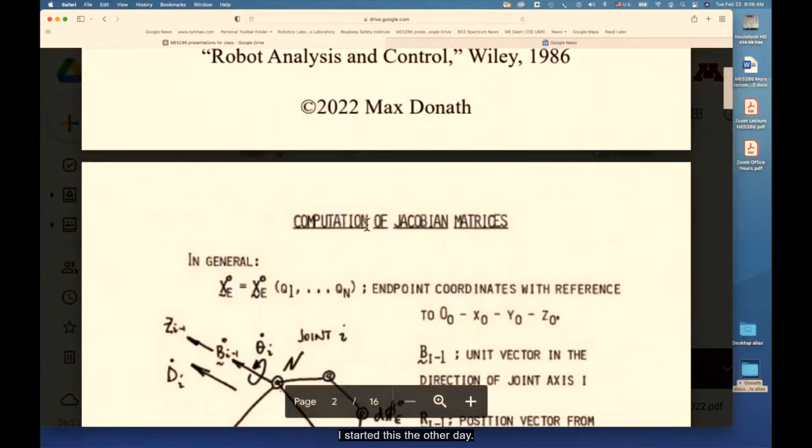All right, so let's begin. I started this the other day, and we're going to be looking at the Jacobian elements. Essentially, we have a robot, multiple degrees of freedom, multiple joints, starting with the base O sub 0, and there's x, y, z. We're going to have a revolute joint. And again, the base joint could be prismatic, and this is just arbitrary. We have a revolute joint in this particular case, in this direction, and there are arbitrary joints all over this robot going in every which way direction.

And if I pick a particular joint, joint I, I think the important thing is to recognize no matter what kind of joint it is, whether it's a revolute joint or a prismatic joint, there's several identifying characteristics of that joint, which is basically related to how we do the DH, the Denavit-Hartenberg convention. But at every joint, there's either going to be a revolute joint, in which case there's an angular velocity, theta sub I dot. Or if it's a prismatic joint, there's a d sub I dot.

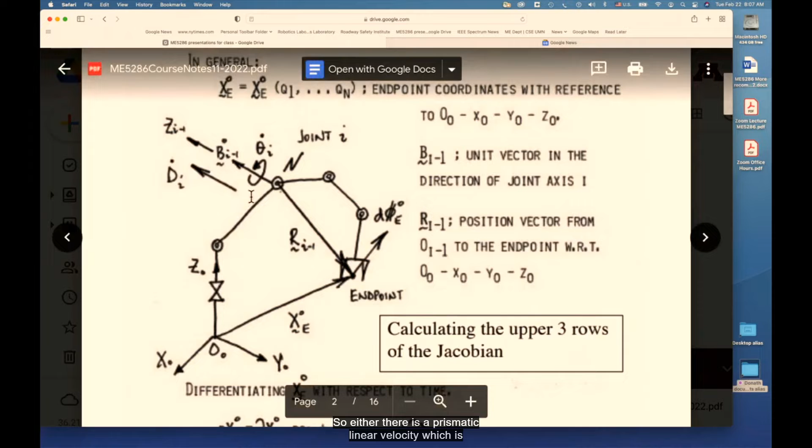So either there's a prismatic linear velocity, which is directed along the z sub I minus 1 axis. Remember, z always, whether it's a revolute joint, it's about z sub I minus 1 for joint I. If it's a prismatic joint, it's essentially an extension along z sub I minus 1. So again, joint 1, joint 2, joint 3. So if I take joint 43, it is with respect to z sub 42. And so there's the normal z-axis.

And associated with each joint, there's a unit vector. The unit vector is always going to be pointing along the z-axis for that, the z sub I minus 1 for that joint. That's this unit vector B. So there are several characteristics at an arbitrary joint. A revolute joint has a joint velocity, a rotational velocity. A prismatic joint has a linear velocity, and they're acting along the normal for that particular joint. And then if we keep going all the way to the end point, this is basically where we're at.

The whole point of the Jacobian is to determine what is the velocity, the derivative of the endpoint with respect to time. And the Jacobian is our way of figuring out in world coordinates and base coordinates, not the joint velocity, the endpoint velocity, how is it related to the individual joint velocities? So that's the whole point behind what we're doing here.

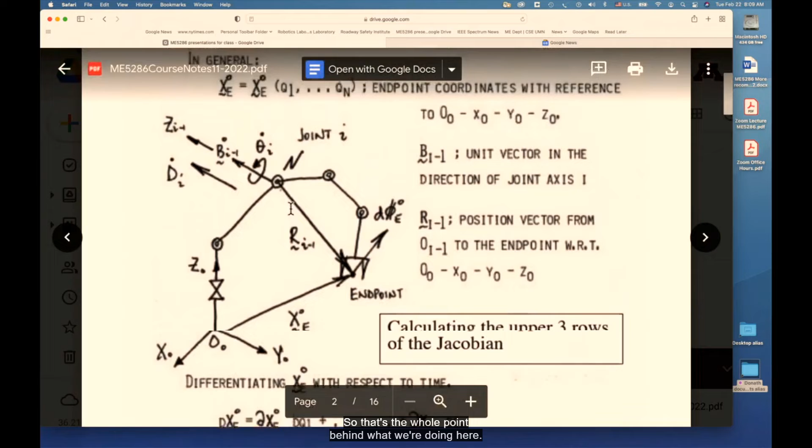B sub I minus 1, the unit vector, and again I basically described this, but a very important vector which I want to point out to you is this vector r, and there is an r sub I minus 1, which is a vector pointing to the endpoint. Now, why is that vector important? Because if it is a revolute joint, there's going to be a cross product involved in order to help us calculate the effect of the rotational velocity of that joint on the translational motion of the endpoint. Okay? There is going to be an effect, and that effect is going to be a function of how far away the endpoint is from that joint. All right, and we're going to just break that down into elements as we move forward.

The other day I laid out this result, and I've put this on the board a few different times, and today I'm going to do it again, but not on the board. Putting it on the board takes a lot of time, and I basically pre-wrote it out, and we'll take a look at it shortly. But before I do that, I just want to remind you that the velocity of that endpoint, again, notice these little zeros up on top, because we are calculating the velocity in the base coordinate frame. And so the velocity, that means the derivative of a vector. Remember, x is a vector. It's going to have three translational aspects to it. There's going to be an x component, a y component, and a z component. So this is the derivative with respect to time.

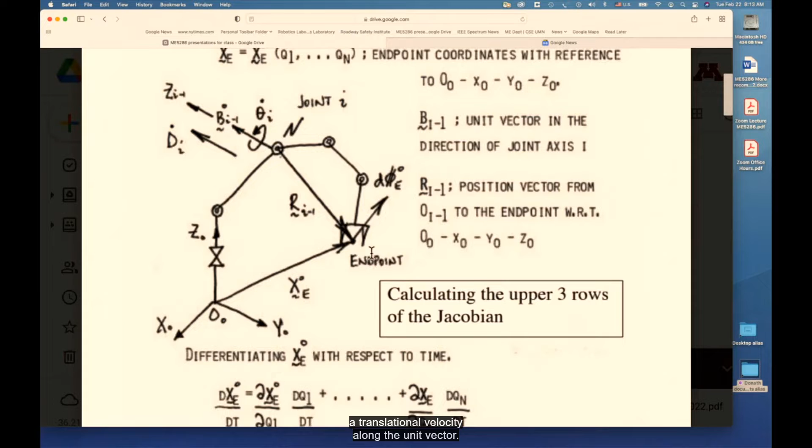This is if there is a translational velocity along this direction, its effect on x sub e is also going to be a translational velocity along the b unit vector. Okay? So there's no magic there.

But if it's a revolute joint, it gets more complicated, because we have to recognize that when we are rotating a particular joint, it will have an effect on the translation of the endpoint. And so we need to remember that if there is an angular velocity over here, theta dot in this case, there's going to be an effect of this angular velocity vector, which is basically theta dot, that's a scalar, multiplied by a unit vector. This is going to be an angular velocity vector.

And the final effect on E with respect to that particular joint is going to be the cross product of an angular velocity vector crossed with the vector, the distance off to that endpoint, which is r sub i minus 1. So it's the cross product of these two. So if I have two vectors and I take the cross product, I end up with a vector that's normal to the plane of the two vectors that are components of that cross product.

So essentially, we can substitute for omega sub i here by theta dot times the b unit vector. And when we replace it, we get this equation where the scalar theta dot is brought out to the outside, and we're going to have a cross product between b sub i minus 1 cross product with r sub i minus 1. Remember, b is a unit vector. R is not a unit vector. That has magnitude. And when we take the cross product of that, we're going to get a vector that's normal to the plane between the b unit vector and the r vector. So for revolute joints, this becomes the component.

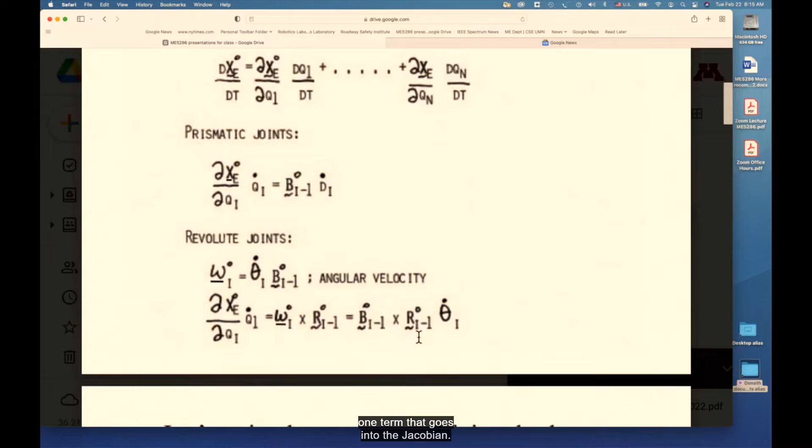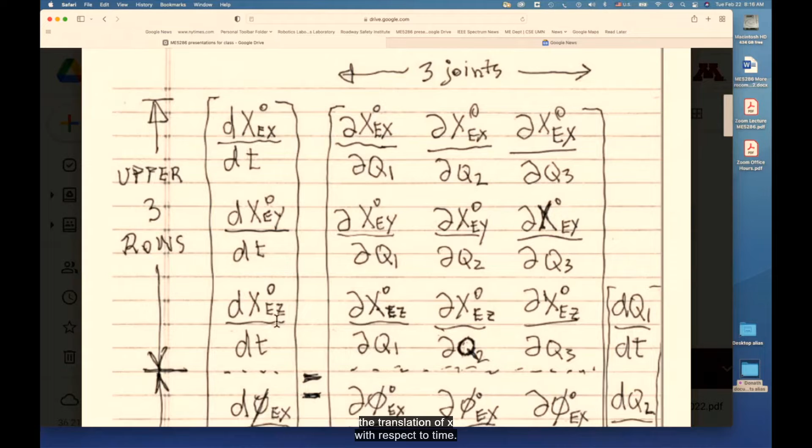And what I'm going to do is write it out and go through some of the steps, because I want you to realize that even when we take a cross product, we're still going to have a 3x1 term that goes into the Jacobian. So let's write out, we're going to do a 3-jointed robot. And so I wrote out all the terms of the Jacobian for a 3x1. So just to remind you, we are always going to have 6 rows. Okay, the top 3 rows are going to give us the translation of x with respect to time. And I broke it up into an x component, a y component, and a z component.

And the bottom 3 rows are going to be basically the derivative of the rotation at the endpoint, wherever my endpoint is. There's going to be also rotations about those 3 axes, and that's d phi e sub x, d phi e sub y, and d phi e sub z dt, and they're going to be equal to another set of elements. And notice there's a q1 dt. There's only 3 joints, so this is going to be a 3x1 vector. Those are the 3 joints. In world space, we always have 6 elements, the upper 3 and the lower 3.

And what we're going to see is, because we have 3 joints, there are going to be 3 columns. And what we're going to do now is examine the upper 3 rows, because the lower 3 rows are going to be handled in a very different way. All right? We're going to make an assumption for the Jacobian that we're always dealing with very small changes in time increments. No matter what robot we're using, when we're talking about velocities, we're talking about breaking all the angles into very small differential changes.

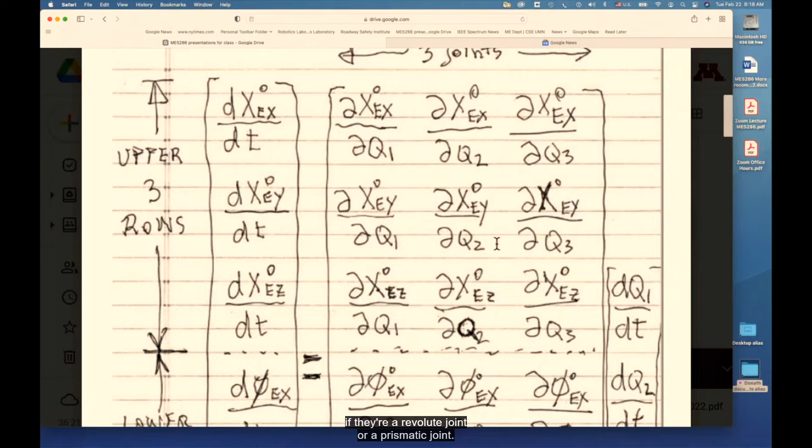And by the same token, depending if these are revolute joints or prismatic joints, we're going to plug in certain terms into the upper 9 elements of the Jacobian. Now keep in mind, if this was a 4-jointed robot, we'd have 4 columns. 8-jointed robot, there would be 8 columns. We're going to just stick to 3 joints in this particular case because the message is the same no matter how many joints we're dealing with.

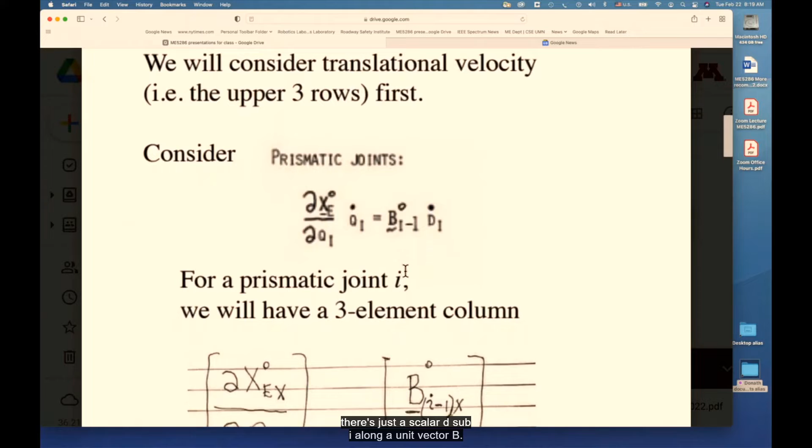So let's consider the upper 3 rows first. And we're going to take a look at this prismatic joint, which I've already shown you this equation over here, which relates the motion at the endpoint with respect to a joint I. And we said if it's a prismatic joint, there's just a scalar d sub I along a unit vector B. And so if we plug in the terms, this is what it's going to look like. So essentially, this is the unit vector along the axis of that prismatic joint. Okay, that's the unit vector, and this is the velocity along that joint.

This is for joint I. So this is joint 6. This was d sub 6, and this would be b sub 5 the x component, b sub 5 the y component, and b sub 5 the z component. So essentially, the upper three elements of that particular column are simply going to be the unit vector along the z-axis of that joint. These are the elements for a prismatic joint. Okay? So that's what we plug in, these three terms.

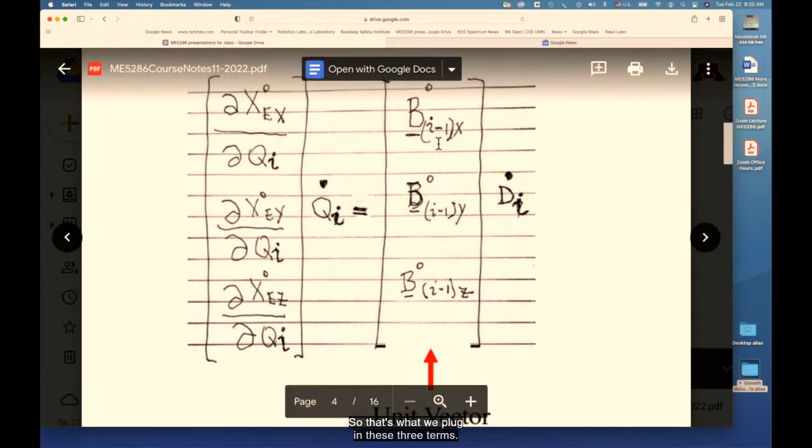If it is a revolute joint, it gets to be a little more complicated, but we'll see that it's a pretty straightforward formula. And we're going to use that formula we already showed for a revolute joint. The relationship is basically the cross product of the B unit vector, which is along the axis of rotation, with the vector connecting that joint to the endpoint, which is this r sub I minus 1. So for a revolute joint, writing it out, we're going to have something that looks like this.

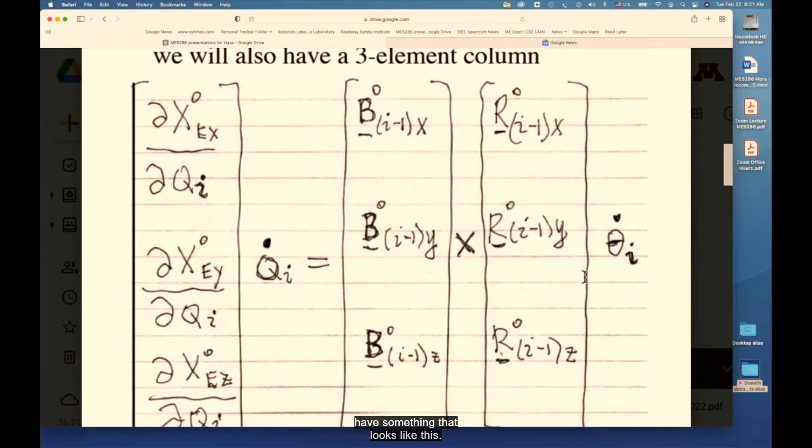And so we're going to have a cross product between the unit vector and the r vector. So if this is joint 4, this is going to be r sub 3 the x component, r sub 3 the y component, and r sub 3 the z component. And it's basically the vector which is going to connect from the joint to the endpoint. And when you do the cross product of two vectors, you get another vector, but it's still going to be a 3 by 1. So it's still going to fill in a 3 by 1 column, and that is going to be the three elements of the Jacobian for a revolute joint.

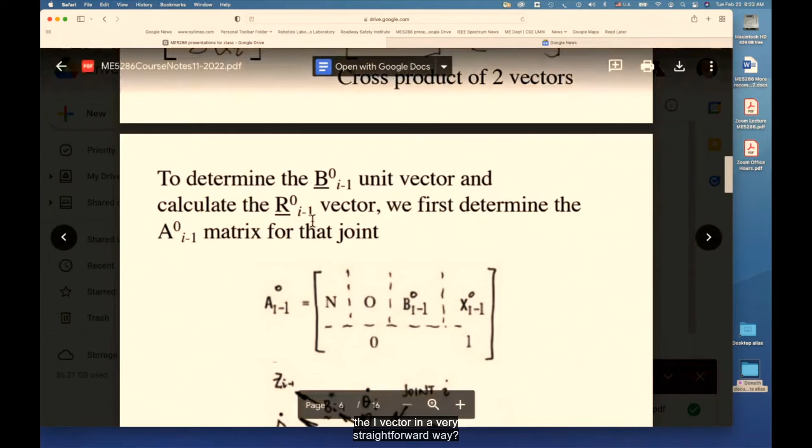So how do we determine this B unit vector? In a very straightforward way. And how do we calculate the r vector in a very straightforward way? Well, I just want to remind you that if you've calculated the A matrices for that particular robot, these are the A matrices that represent the 4 by 4 that takes us from the base coordinate frame. Notice I still have a 0 up here. If we go from the base coordinate frame to joint 4, for example, remember this is going to be A sub 3. This is essentially the product of a number of A matrices that take us from joint 1 to joint 2 to joint 3 and so on.

Once we've multiplied all the A matrices to a particular joint, we're going to have a 4 by 4 matrix. And if we look at the components of that 4 by 4 matrix, the upper 3 by 3 is a rotation matrix, and the upper right 3 by 1 is a translational vector. This x sub I minus 1 is going to tell us where this position is in world coordinates from the base.

Okay? This 3 by 1 is telling us where we are over here. And this, remember what we said about this rotation matrix? The upper 3 by 3 of a 4 by 4 DH matrix: the first column is the normal. It basically represents a coordinate frame where the first column represents the x coordinate, the second column represents the y coordinate, and the third column represents the z coordinate. We call them normal, orientation, and approach, but it doesn't matter what convention you use.

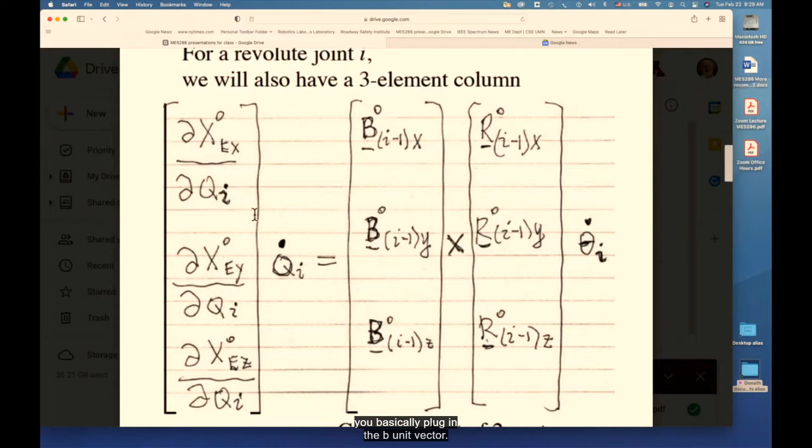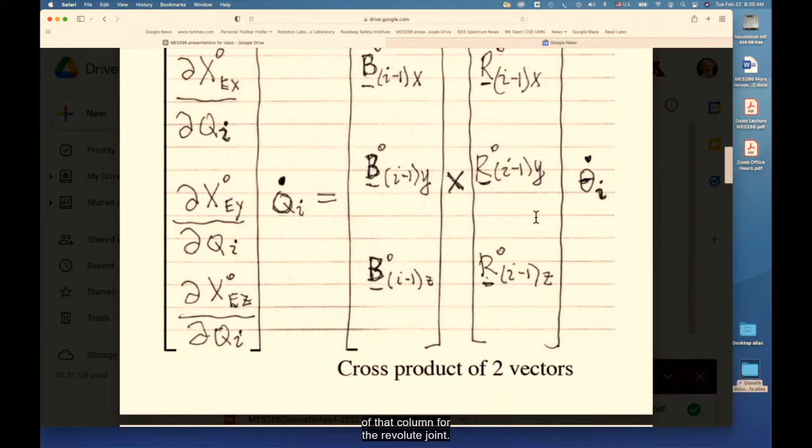So just reviewing very quickly, for a prismatic joint, you basically plug in the b unit vector. And if it's a revolute joint, you have to calculate the A matrix. Once you've calculated the A matrix, you have the b unit vector, and you have the x sub i minus 1. You have to do a subtraction to get the R. Once you have the R, you do the cross product, and you then plug in the three terms of that column for the revolute joint. Okay? Those are the steps.

So, if I go back, I'm sorry, I hope I'm not giving you whiplash here. We've basically determined how to calculate this column or this column or this column of 3x1s, depending on if it's a revolute joint or prismatic joint.

Now we're going to take a step aside, and we're going to take a look at the lower 9 elements of the Jacobian. And again, if there were 5 joints, they would be 5 times 3, or 15 elements. But again, we're going to stick to 3 for right now.

And so we're going to go through a complicated process here, step by step by step. But at the end, what we're going to find out is that the terms that plug in over here are really simple terms. Okay? They're going to end up being either unit vectors of that, the unit vector of B, or zeros. Okay? That's what we're going to end up with.

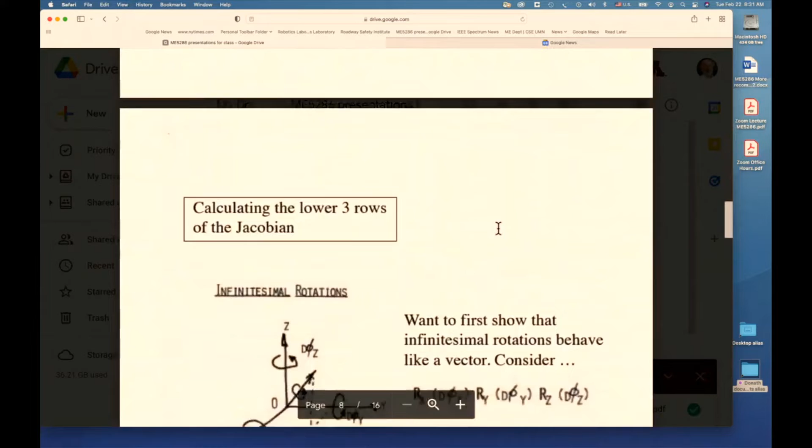So I'm giving you the end of the novel before I spend quite a bit of time on going through the steps to show you that that's valid. All right? So let's take a look at that. So we're going to look at the lower 3 rows of the Jacobian. And what we're going to be looking at is, let me just pick this up.

What we're going to be looking at very specifically is we are now going to identify rotations about x, rotations about y, and rotations about z. Remember, we're now dealing with small rotations at the endpoint. So if I have a coordinate frame attached to the endpoint,

and I want to have a very small rotation about x, which we're going to call d phi x, a small rotation about y by d phi y, and a small rotation about z by d phi z, we want to determine what we plug into the lower 3 by 3, in our case, of the Jacobian.

And what we're going to do is we're going to show that they behave like a vector. When we're dealing with very small rotational changes about x or y or z, we're going to see they have the properties of a vector. The properties of a vector that are important in our particular case is order doesn't matter.

Remember what we said before when we move and we shift coordinate frames and we first rotate about x and then rotate about y and then rotate about z. That is not the same as first rotating about y, then about z, and then by x. But when we're dealing with very small angles, yes, it doesn't matter what the order is, and I'm going to show that.

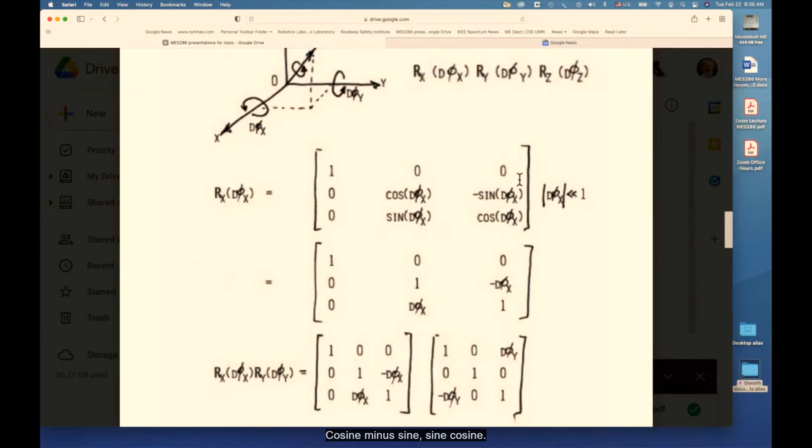But the bottom line is if I have a 3 by 3 rotation matrix, this is a rotation by a small d phi x about x. This is what the rotation matrix looks like. Cosine minus sine, sine, cosine. And we're going to look at very small d phi x. That means way smaller than 1. And again, we're dealing in radians. This is what the 3 by 3 matrix ends up looking like.

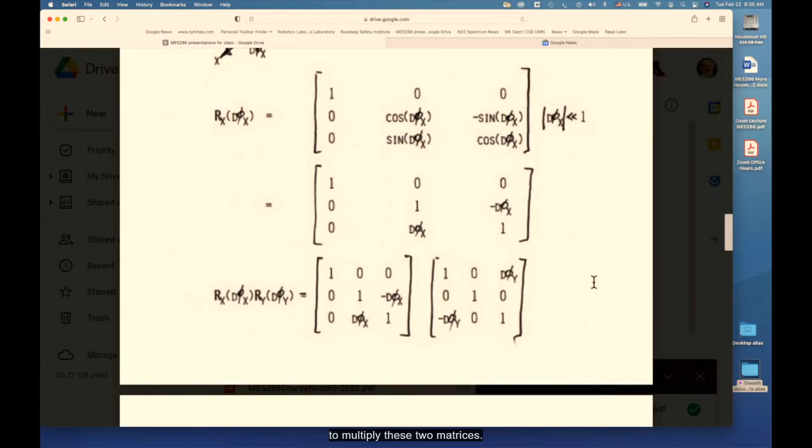And so here is d phi x. This is a rotation about x by d phi x. This is a rotation about y by d phi y. And what we're now going to do is we're going to multiply these two matrices. We're going to multiply one 3 by 3 matrix by another 3 by 3, and we're going to get a 3 by 3 matrix outcome.

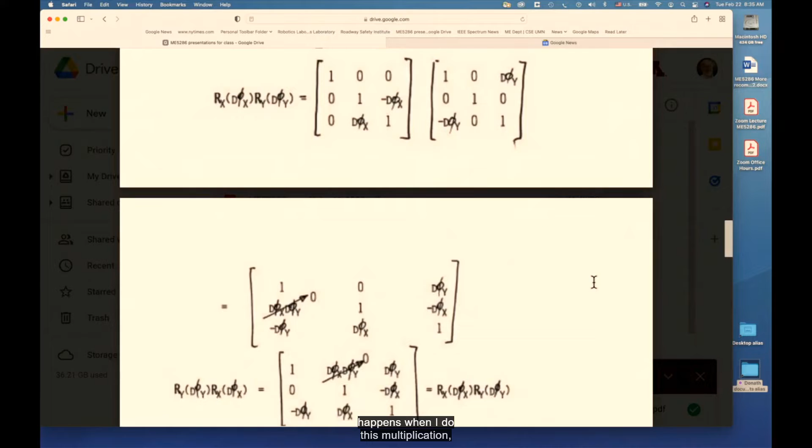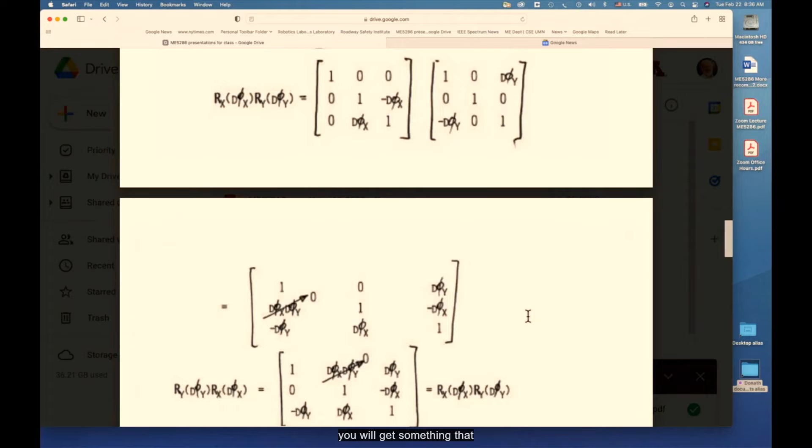But notice the important thing that happens when I do this multiplication, and I'm not going to spend time on doing the multiply, I just wrote it out over here. Notice that when we have a very small number, 0.01 times 0.01 is going to be 0.0001. So we're talking about when you take the product of very small numbers, you're going to get something that we're going to approximate as 0.

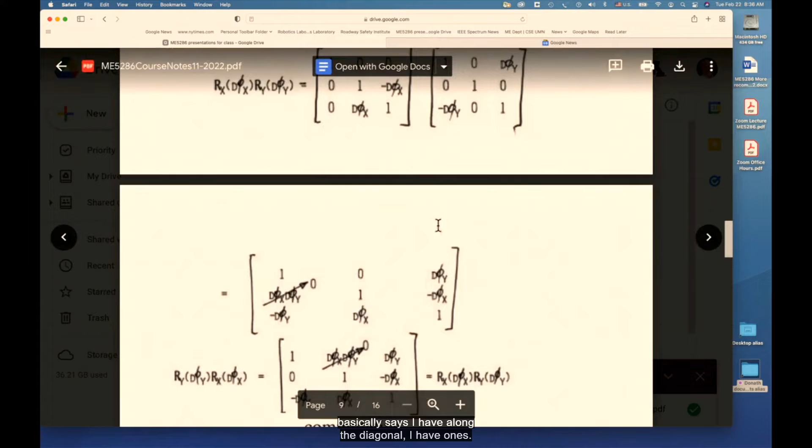So notice when I had d phi x times d phi y, I'm going to call that 0. And so when I take a rotation about x multiplied by a rotation about y, by d phi x and d phi y, I'm going to get a result that basically says along the diagonal I have 1s. I'm going to have a d phi y up here, a minus d phi x here, d phi x and minus d phi y. And notice if I did the same thing, but did a rotation about y, this is what I would get if I did a product of first a rotation about y, then a rotation about x. And I carried it out, I got this 3 by 3. Then this term would go to 0.

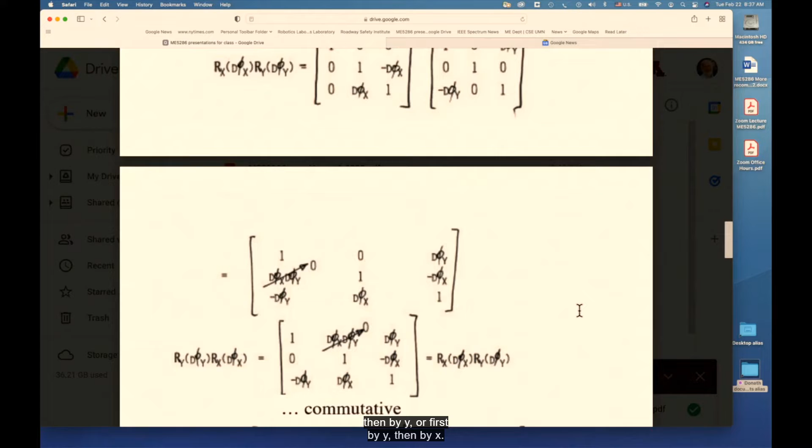And if this term goes to 0, notice that this expression is essentially the same whether I'm multiplying first by x, then by y, or first by y, then by x. Order no longer matters, so we call that commutative, and that's one important property of vectors. So it behaves like a vector. All right, wonderful. But keep in mind, we're talking about very small angular changes. With the whole notion of Jacobians, it's critical to remember we're dealing with small incremental changes so that we can make this kind of an assumption.

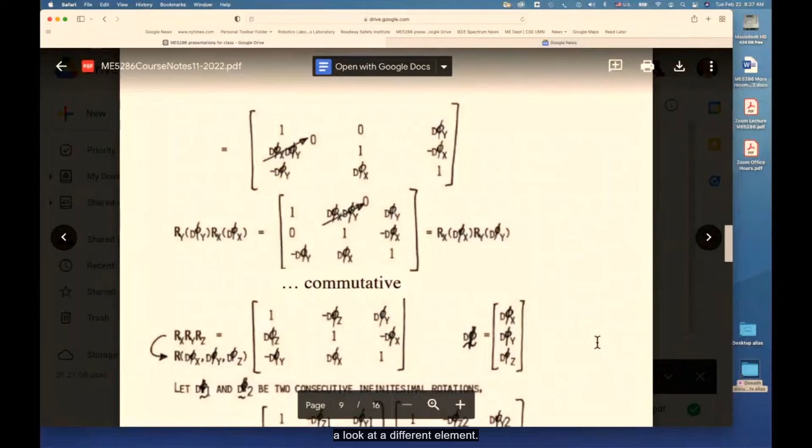And now we're going to take a look at a different element. We're basically going to say that this d phi behaves like a vector, and it's going to have components d phi x, d phi y, and d phi z. Remember what those are: small rotational changes about x, small rotational changes about y, small rotational changes about z. These are not 50 degrees, 30 degrees, 10 degrees. We're talking about very small numbers, fractions of a degree. And so this is a 3 by 1. And so let's take a look.

Notice this element: this is the product of rotation first about x, then a rotation about y, and then a rotation about z. This is what it looks like. If I plug in all the terms and get rid of all the second order terms, I'm going to get this expression. And that's true whether I do Ry times Rz times Rx or Rx times Ry times Rz. It doesn't matter what the order is. We're always going to get this 3 by 3 matrix.

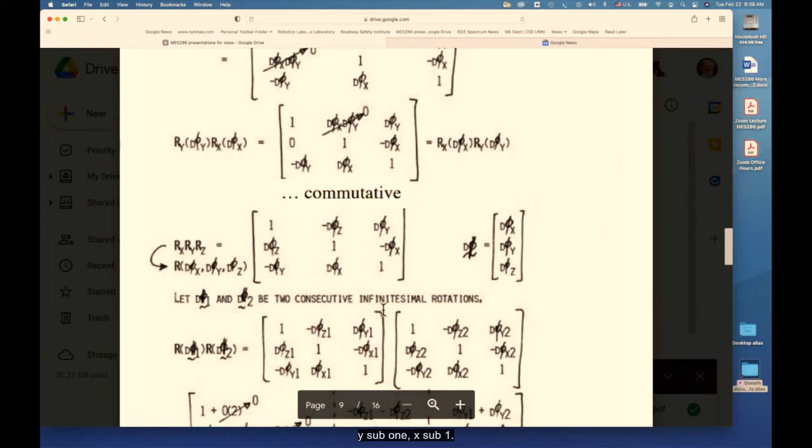And now what I'm going to show you is what happens if I have two small sets of rotations. First I'm going to do a rotation by a very small angle vector, 3 by 1, of d phi 1. And then I'm going to consecutively multiply by d phi 2. And again, we're talking about very small rotations. This 3 by 3 is going to look like this. Notice the components are z sub 1, y sub 1, x sub 1. Just plug them in over here, I get this. And this is going to be the second 3 by 3. Notice I've changed everything: here it's z sub 2, y sub 2, x sub 2.

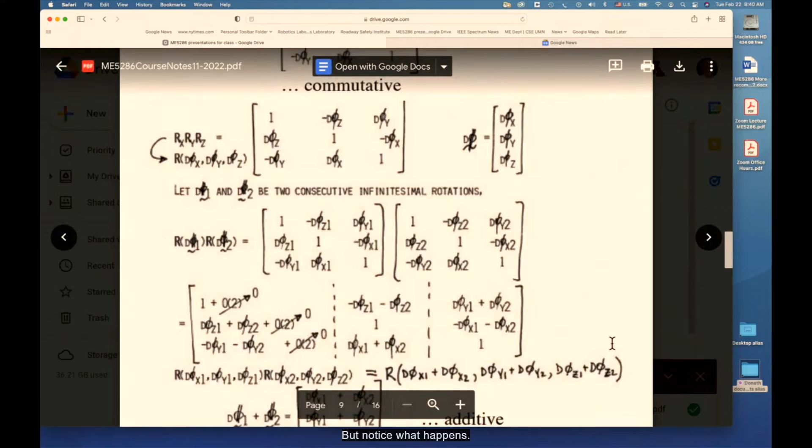If I take this 3 by 3 and multiply it by this 3 by 3, I'm going to get a 3 by 3. But notice what happens. I'm getting rid of all the second order terms. Anytime I have the product of two small angles, I say they're equivalent to 0. And then when I take the product of these two 3 by 3 matrices, notice what happens to the components. Each of the elements, where before it was d phi z sub 1, it's now the sum of d phi z1 plus d phi z2. Here it's the sum of d phi z1 and d phi z2.

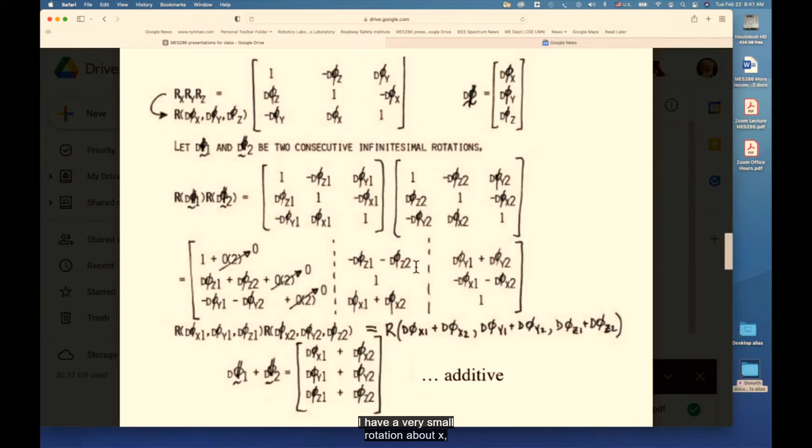So what's happening is when I take two small orientational changes, I have a very small rotation about x, small about y, small about z. And then I do another small rotation of x, y, and z consecutively. It's as if I just did one rotation of the sum of each of those two small rotational changes. So in effect, doing two consecutive small rotational changes is the equivalent of adding the components, which again makes this behave like a vector.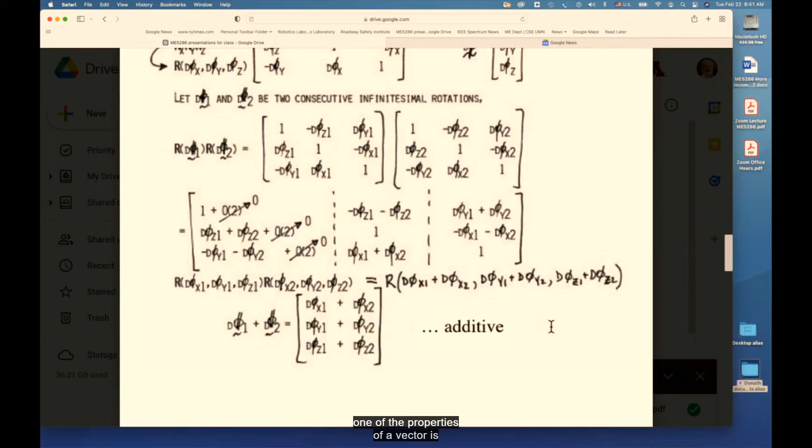One of the properties of vectors is that if I add vector 1 plus vector 2, in effect we can sum the components of those two vectors, and we're going to end up with the result. So that means they behave like a vector. We can treat them like vectors, and that's what we're going to end up doing to simplify a lot of the results in the Jacobian.

I just want to take you back for something and just remind you. If we take a look, now I'm going to basically do very simple large rotations. If I start off, here's x, here's y, and here's z. And I'm going to now rotate along the x-axis by 90 degrees or pi over 2, and 0 along the y and 0 along the z.

So let's take a look at this particular case. Here's where I start off with x. I'm going to rotate by 90 degrees. So this y is going to move up this way. Z is going to move down. So I'm going to end up with this coordinate frame.

Then I'm going to take this coordinate frame, and I'm going to say I now want to rotate it about y by 90 degrees, but nothing about x and nothing about z. So here, again, use my right-hand rule, stick my right thumb up along y. I'm going to rotate about y by 90 degrees. Z is going to move to where x was, and x is going to move over here. We're going to end up with this coordinate frame.

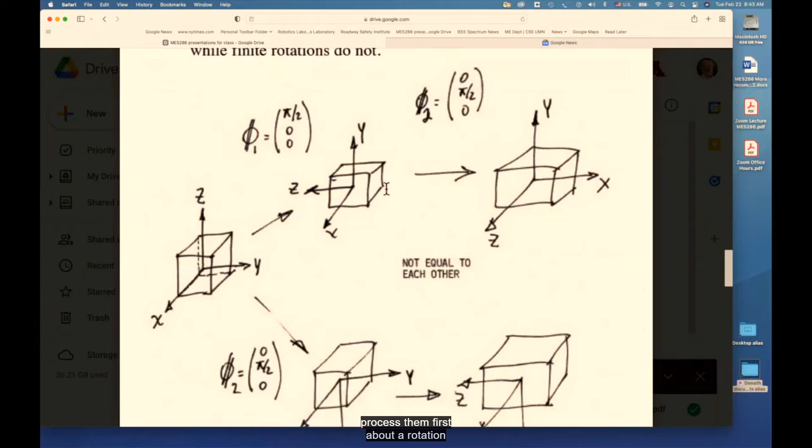So if I have one coordinate frame, and I process it first by a rotation about the x-axis by a large angle, and then about the y-axis by a large angle, I'm going to get this result. And if I now reverse the situation, I first rotate 90 degrees, and this time I'm rotating about y. If I rotate about y, again, z moves down, x moves down. I'm going to get this coordinate frame.

And now I'm going to rotate 90 degrees about the x-axis. Again, put my right thumb down along x. When I do that rotation, z is going to move this way and y is going to move this way. Notice these two coordinate frames are not equal to each other.

So when we're dealing with large rotations, and by the way, large could be 5 degrees, order matters big time. But when we're dealing with fractions of a degree, order no longer matters. And that's an important takeaway from all this. And that is why we're going to be able to do some very simple things if we're looking at the lower 3 by 3 terms.

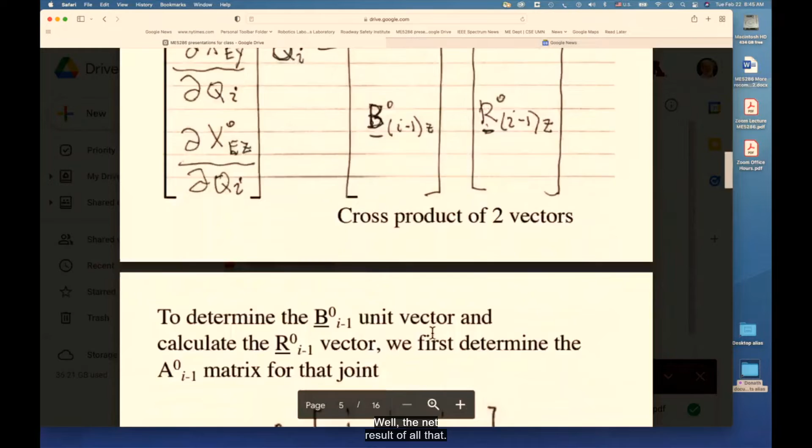Let's go back and just refresh your memory what I'm talking about. Sorry that I'm swinging all the way up here. We're now looking at the lower 3 by 3 elements. Essentially, what we're saying is we can look at these as vectors, but what is the net result of all that? Well, the net result of all that, sorry for bouncing around, go down here.

Essentially what we're saying: if there are small orientational changes at the end effector, those small orientational changes are equivalent to simply whatever's going on in the revolute joint at that particular joint. It's also occurring at the end effector. So if there is a theta sub i dot multiplied by a unit vector at a revolute joint anywhere in that manipulator, that is shifted over to where the end effector is in space.

And we're also saying that if there is a prismatic joint anywhere, it has no effect on the orientational changes at the end effector. So for a prismatic joint, the 3×1 elements of the Jacobian are simply 0. And if there's a revolute joint, whatever took place at that particular joint is going to have effect on the endpoint, and it doesn't matter what's going on in the rest of the robot. So in effect, we end up with very simple elements in the lower 3, in our case for a 3-jointed machine, 3×3.

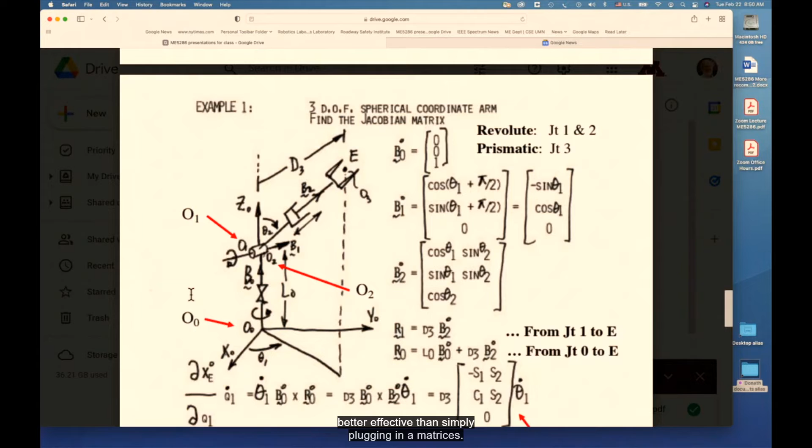Because when you do A matrices, number one, making one small mistake in a product will give you some bad results. Obviously, you can make small mistakes here too. But I just want you to see where all the unit vectors are. There are going to be two revolutes, joint 1 and joint 2. And joint 3 is going to be a prismatic joint.

And so we're going to go through this analysis. And I'm going to just show you where all the unit vectors are and where all the magnitudes are. And we're going to just review all this and take our time doing it so that you see all the pieces and how they come together.

So let me first start off by identifying what this robot looks like, where the revolute joints are. And when I did this initially, I recognized afterwards it's sometimes hard to see that this is O sub 1. So this is O sub 0 over here. This is O sub 1. And there is O sub 2. So this time I added some red arrows to capture your attention of where they are.

And notice the two revolute joints. The first revolute joint, there is theta 1. Okay? And theta 1 is rotating about Z0. Z0 is straight up over here. There's Z0. It's rotating about Z0. So there's theta 1. There's X sub naught. And there's Y sub naught. Okay?

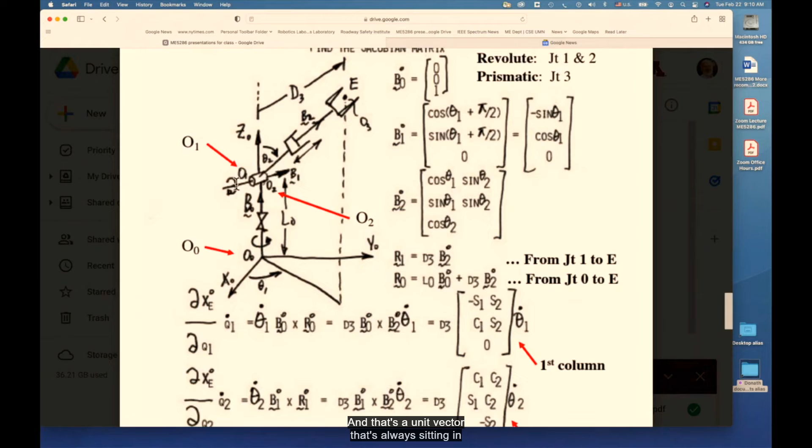Again, just to remind you, we have two revolute joints and one prismatic joint. First revolute joint is rotating about B sub 0, which is pointing straight up. The second rotational joint is rotation about B1, the unit vector, and that's a unit vector that's always sitting in the xy, xoy plane. Okay, so there's this B1 which can rotate around, and we just finished discussing and describing that that unit vector B1 is going to depend on theta 1 because it's 90 degrees offset from the original x or y coordinate frame. And so the unit vector B1 looks like this.

Now let's take a look at the B2 unit vector, which is a little more complicated, and you're going to have to turn your three-dimensional visualization brains on to see this. So first of all, remember what we're trying to do. We're trying to calculate the three terms, a term in the x direction, y direction, and z direction of where this B2 is pointing. So imagine for a moment that wherever it's pointing up here, it's going to be pointing based on the value of theta 2.

And theta 2 is an offset from the vertical. Okay? It doesn't matter which way. It's an angular rotation about the B1 vector, and so it's an offset in this direction. So let's for a moment think that this vector O sub 1 to E, if we basically project it down into the XOY plane, we're going to get this little solid line over here. This solid line is a projection of this vector into the XOY plane.

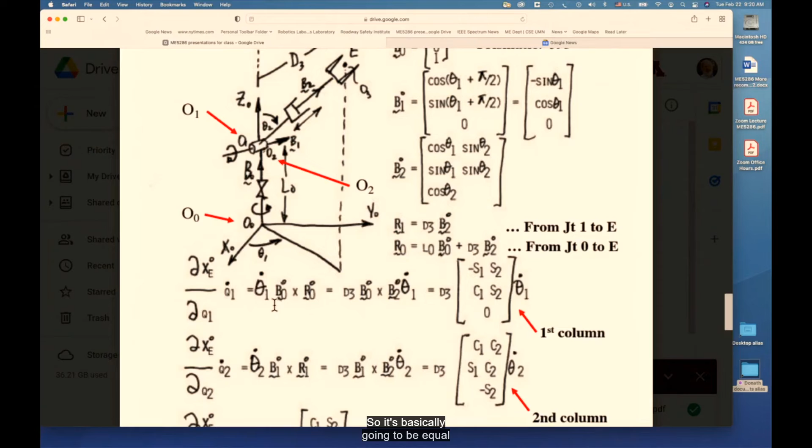Remember what we're doing. We're taking the partial derivative of E, which has 3 components, with respect to the first joint, joint 1. And we've said this is a revolute joint. So it's going to be equal to theta 1 dot times the cross product of B sub 0 crossed with R sub 0.

Okay, so B sub 0 is this term up here. That's this term here. It's just a very simple 0, 0, 1. But it's crossed with R sub 0, which we said is L sub 0 times B sub 0 plus D sub 3 times B sub 2. So when we're doing a cross product of this expression, we basically do the cross product of each of the two of them. The cross product of a vector crossed with itself is 0. Okay? So the cross product of B sub 0 with this component just disappears.

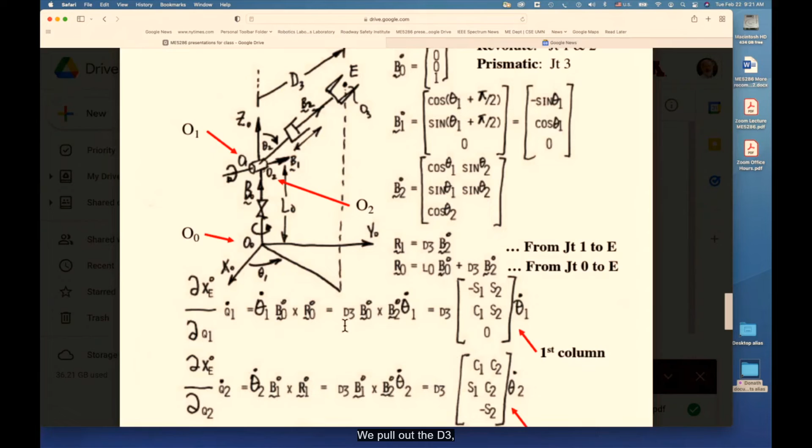And so we're simply going to have the cross product of basically D3 B0. We pull out the D3, which is over here. And it's going to be the cross product of B0, which is right here, crossed with B2. So the cross product of B0 crossed with B2. There's D3, which is the value of the displacement at that particular point. And it's going to be multiplied by the joint velocity theta 1.

So theta 1 dot. So be careful. This is a dot, not a little 0. I'm sorry for the potential confusion. This is the derivative of theta 1 with respect to time. D3, at that instant in time, is a constant. And we're doing the cross product of B sub 0 crossed with B sub 2.

So if we take the cross product, and remember, this is a simplified version of a cross product: you essentially take the magnitude of vector A, the magnitude of vector B, multiplied by the sine of the angle. And again, remember the cross product is always normal to the plane of A and B. When we do that, we effectively get minus S1 times S2, C1 times S2, and 0 over here. So there's no motion in the z direction.

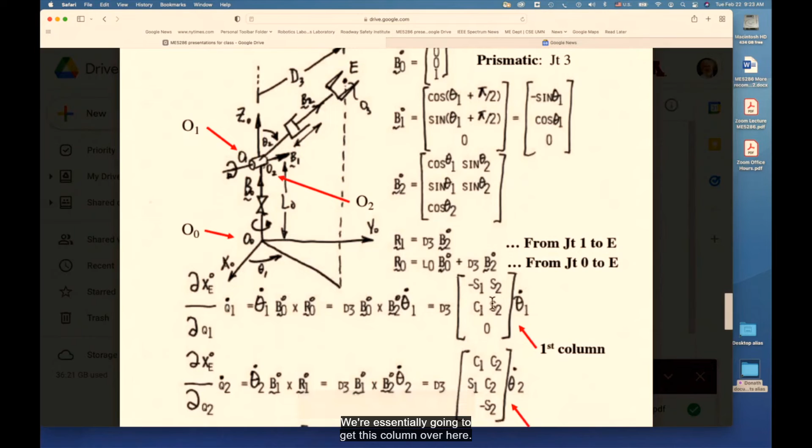When we do the cross product of B sub 0, which is this very simple expression, with B2, which is this expression, we're essentially going to get this column over here. This is going to be the first column. And what are we talking about? This is the Jacobian. Here it is, minus D3 S1 S2, D3 C1 S2, and 0. Those are these three elements in that first column. D3 minus S1 S2, D3 C1 S2, 0.

Then if we do the next element, this is going to be theta 2 dot. This time it's B1 crossed with R1. R1 is D3 B2. That's a unit vector. So this is D3 B2. We cross it with the unit vector B1, which is this term over here. When you take that cross product, you get this expression, which is going to be the second column: D3 C1 C2, D3 S1 C2, minus D3 S2. There's the D3 C1, D3 S1, D3 minus S2.

And then when we take the third partial derivative of x with respect to the third joint, remember, is a prismatic joint. Because it's a prismatic joint, it's simply going to be the unit vector B2, which we've calculated up here, multiplied by D3 dot. So we get this expression, which is going to be the third column. So those are the first three columns for those joints.

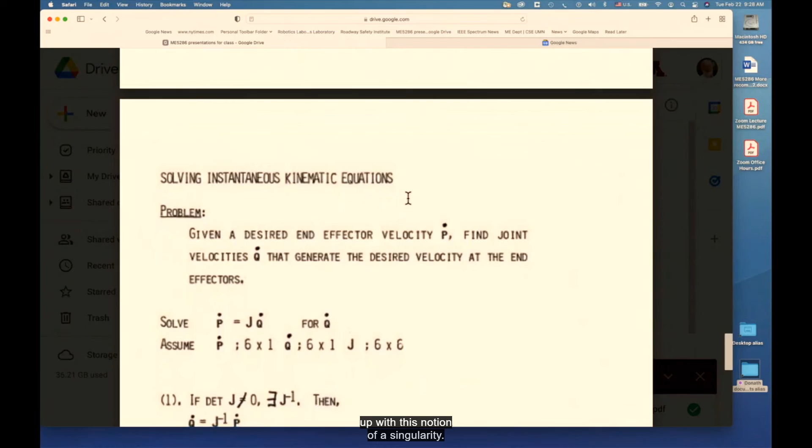So let's go a little step further and actually come up with this notion of a singularity. So if we're solving these instantaneous kinematic equations, if I have an end effector velocity, which we're going to call p dot. Remember p dot, the upper three elements are essentially x. And the lower three elements are the small differential changes, small angular changes. And so this is going to be a 6 by 1.

And we have joint velocities q dot. And how many elements are in q dot? Well, that depends how many joints we have. If we have 4 joints, there are going to be 4 q's. 3 q's for 3 joints, and so on. And q can be a revolute joint or prismatic joint.

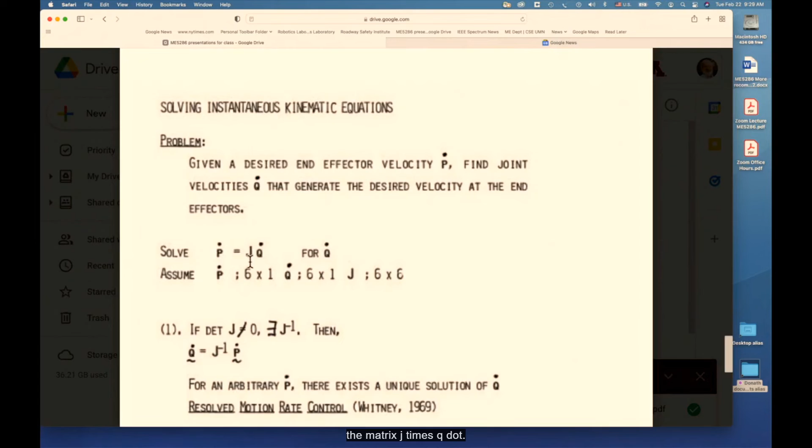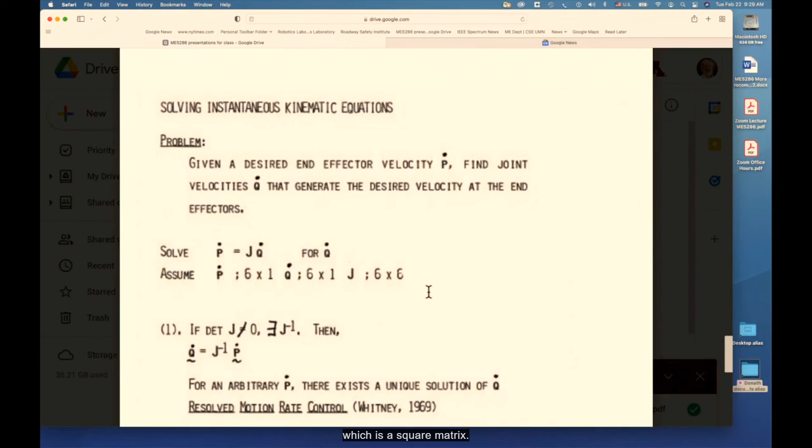So if we solve, p dot is going to be equal to the matrix J times q dot, and we're going to assume that p dot is simply a 6 by 1 vector, which I've discussed. Q dot over here could be a 6 by 1 if it's a 6-jointed machine. And if it's a 6-jointed machine, we get a Jacobian of 6 by 6, which is a square matrix. Square matrices are so much easier to deal with when trying to calculate inverse.

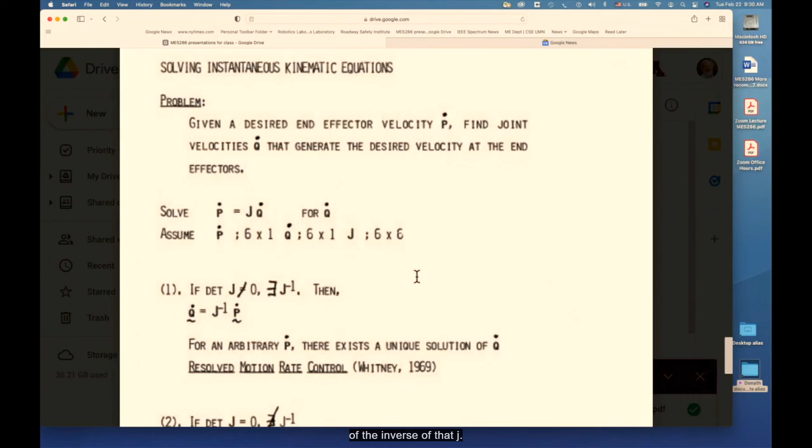But the bottom line is, and I don't want to go back and remind you what determinants are, the determinant of the Jacobian better not be equal to 0, because otherwise we're going to have problems with the inverse of that J. Why is the inverse of J important? Because if I have an equation p dot equals J times q dot, then I should be able to pre-multiply both sides of the equation by the inverse of the Jacobian to give me this.

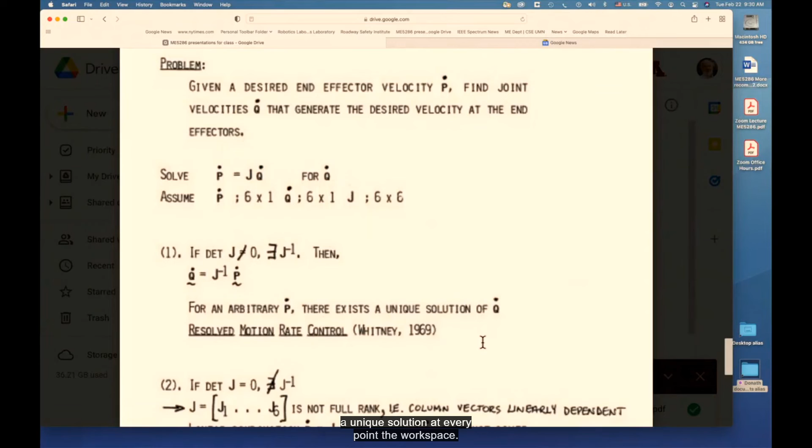But this is only going to work at locations in the world where that inverse of the Jacobian exists. And what that really means is that there is a unique solution at every point in the workspace. If there is an inverse, that means there's a unique solution. But if the determinant of J equals 0, and we're going to take a look at a simple example shortly, then there is no J inverse.

If there's any place in the workspace, remember J changes depending where I am in the workspace, different values of theta, different values of d, etc. At any location in the workspace, if the determinant of the Jacobian is 0, then there is no inverse of the Jacobian at that particular location. And I don't want to get into all the math.

One of the things I try to avoid is making this a course in mathematics. I'm much more interested in your understanding intuitively what these things mean. But essentially, what this is telling us is that we cannot calculate every possible variation of the p out there, and there are going to be locations where there's no inverse, and that means think about dividing by 0. It just goes off to infinity, and those are bad places.

You don't want to move your robot around singularities. Okay, so anytime the determinant of J is equal to 0, that particular configuration is called a singular or singularity. All right? Avoid them by all means. And that's why some companies have developed 8-jointed robots and 7-jointed robots, just added joints to get rid of some of these singularities. Is that really the solution to this?

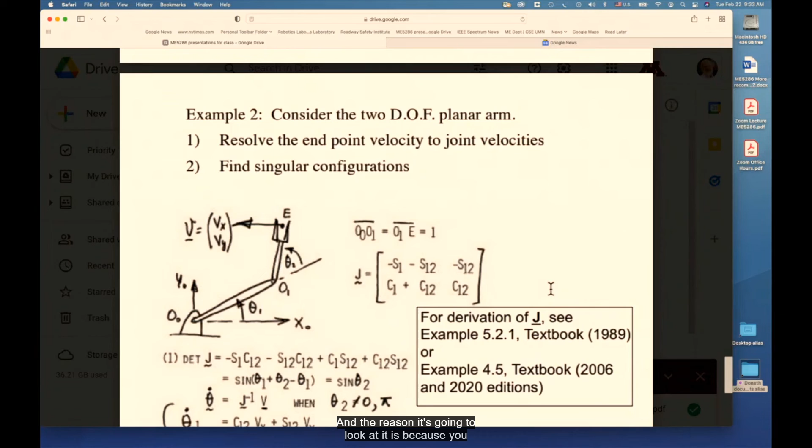We're going to take a look at a very simple 2-degree of freedom planar arm. Okay? The reason we're going to look at it is because you can see some of the results pretty easily and quickly. So let's just translate everything we've talked about now to a 2-jointed, very simple arm where only motion in the plane is allowed. Okay? There are 2 revolute joints, theta 1, theta 2. You can see them right here.

The endpoint is E, somewhere in the end effector, depending on what the application is. And ultimately, there is a vector v sub x and v sub y, which is essentially the 2 components of the velocity at point E. And so the length from O0 to O1, we're going to call that 1, length 1. That's very straightforward. And we're going to call the length from O1 to E also equal to 1. There's no point throwing in an L1 and L2. Just makes our life more complicated.

The Jacobian of this two-dimensional planar robot is very straightforward. I'm not going to do the calculations because in your textbook, no matter if you're using the 89 edition or the 2006 edition or the 2020 edition, it calculates the Jacobian. It's example 5.2.1 in the 89 edition and example 4.5 in the latest editions. So it works it out. This is what the Jacobian looks like. So let's do a very quick calculation of the determinant. It's relatively straightforward because this is such a simple 2 by 2 matrix.

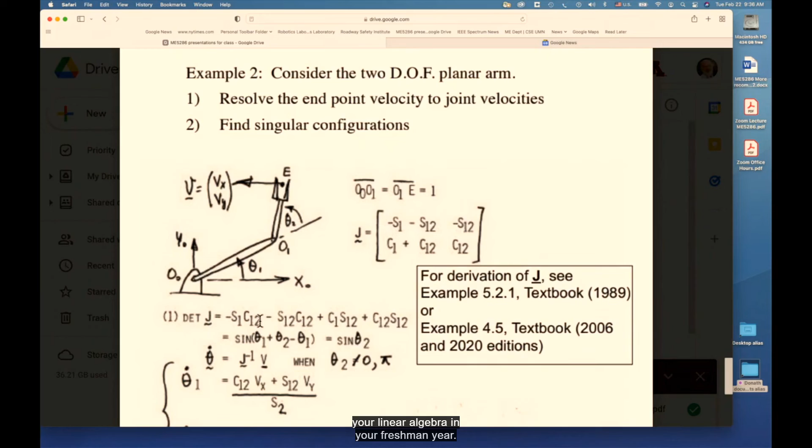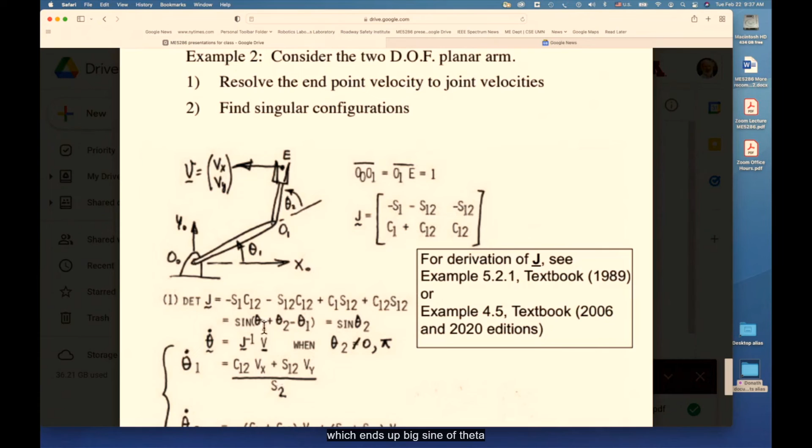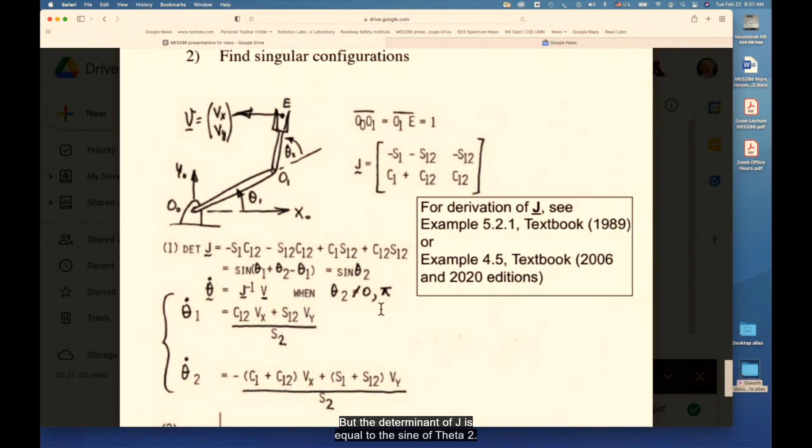You should remember that from your linear algebra in your freshman year, and maybe even in high school. And whenever we have such a crazy trigonometry equation, there are some simplifications we can do. Remember, s sub 12 is the sine of joint angle 1 plus joint angle 2. We can do some trigonometric simplification, which ends up being sine of theta 1 plus theta 2 minus theta 1, which means that this determinant is equal to sine of theta 2. I'm not going to go through the trigonometry right here, but the determinant of J is equal to the sine of theta 2.

That's the sine of this angle over here. There's theta 2. So theta 1 dot, remember what we're doing, theta 1 dot is going to be equal to the inverse of the Jacobian times the velocity vector. And what I'm telling you right now is, given that the determinant is sine of theta 2, when theta 2 is going to be equal to 0, what happens to the sine of theta 2? You know, it goes to 0, okay?

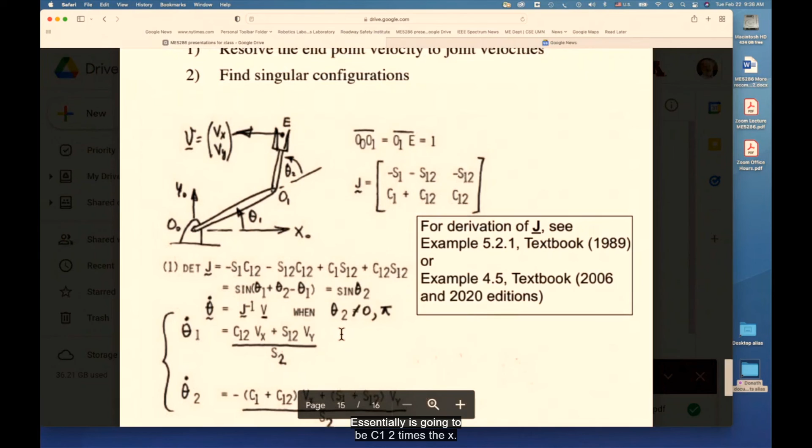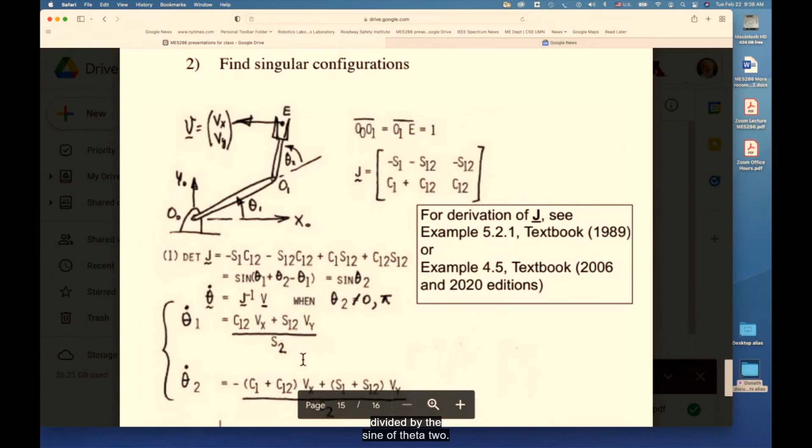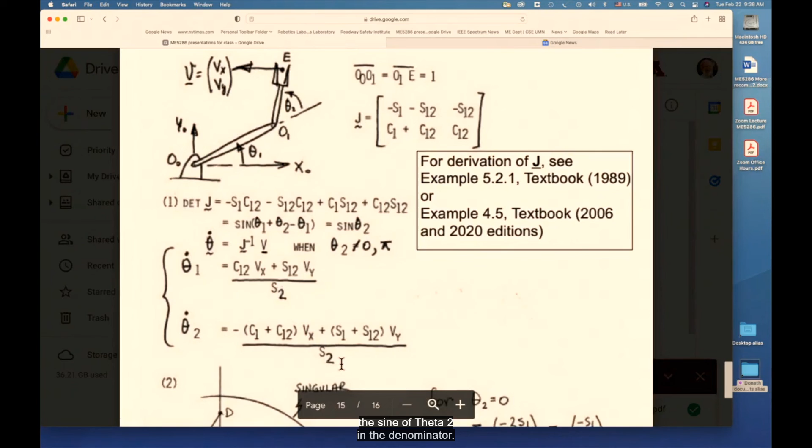Because theta 1 dot is going to be equal to this expression. Essentially, it's going to be c12 times vx, remember, plus s12 times vy, divided by the sine of theta 2. If the sine of theta 2 is equal to 0, we end up with theta 1 dot being infinity. And the same thing, we have the sine of theta 2 in the denominator. So essentially, that's a no-no too.

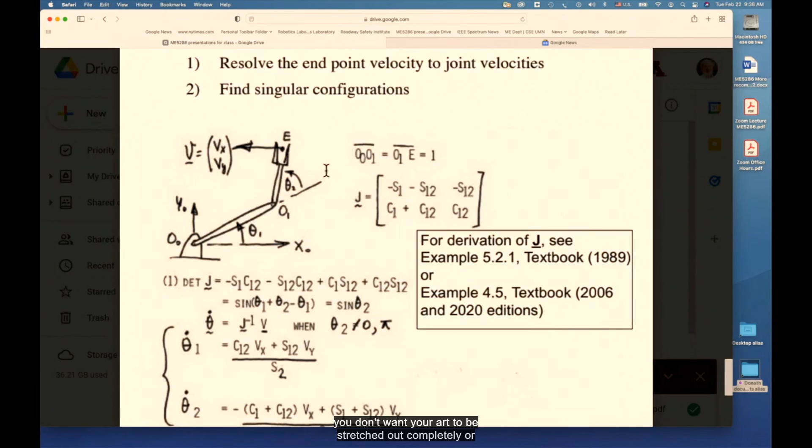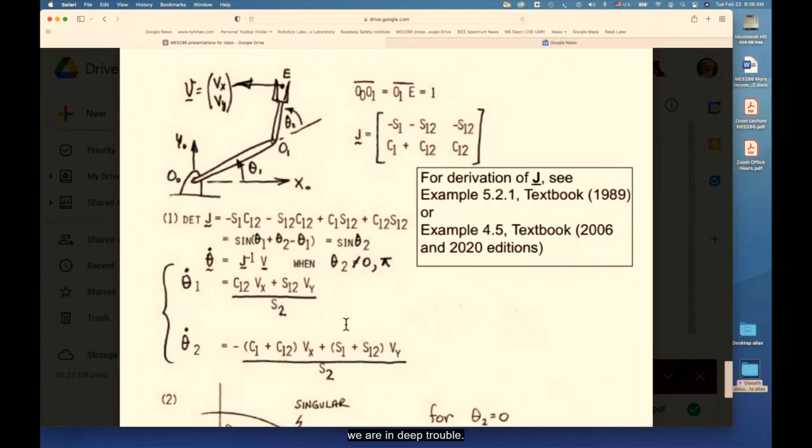We do not want to have theta 2 equal to 0 or pi, which is 180 degrees. So again, we don't want your arm to be stretched out completely or swung back around on itself for the two angles, because when that happens, we are in deep trouble. Okay? So this is the result. So I just want to take a look at a particular, again, two-jointed machine. And we're going to look at its singularities and what happens.

Whenever we have singularities, whatever the robot is, when it's fully stretched out at the bounds of its workspace, stay away from the boundaries of the work zone. You don't want to have your arms stretched out because that's not a good place to do any activity, because you're limited in some directions. But let's look at the other singularity. Remember what we said, either stretched out, theta 2 is 0, or theta 2 is 180 degrees. That means it's all swung back on itself.

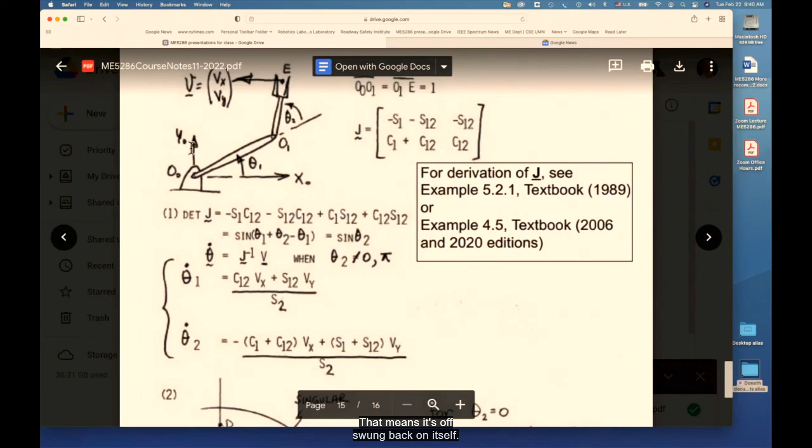So let's look at what happens. Here I have a robot. I want to move from A to B. And let's say I want to move to the singular position, which is over here. And then I want to move straight up to C and to D. Think about that for a moment. I want to move along a straight line. Moving from A to B is no big deal. Okay? No problem. But what happens as I get closer and closer to this position?

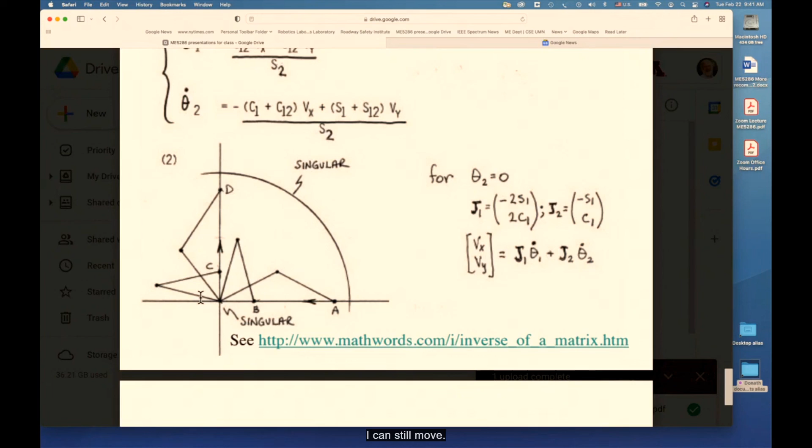If I just want to move straight through, not a big deal. Okay? Along certain directions, I can still move. But at singularity, I cannot move up in this direction at that moment in time, because what does that require? It requires that this joint angle, this theta 1, has to swing around instantaneously to this position, so this endpoint, which is here, can move up to C. That has to happen in really small delta t's.

What that basically means, I'm moving at infinite velocity at that point for me to be able to swing around so that I can continue my trajectory in a vertical direction. Once I'm at C, no problem moving to D. But when I get closer and closer to this position, even if my B is over here, even if I don't go right through the singularity, the closer I get to the singularity, the larger the velocity of joint angle 1 has to be to continue whatever motion I'm doing.

Think about the UR5 if you've ever moved the endpoint somewhere over the z-axis, the original z-axis of that robot. It goes per plunk, and essentially it's because the velocities are high enough that it causes the bearings to get kind of stressed out.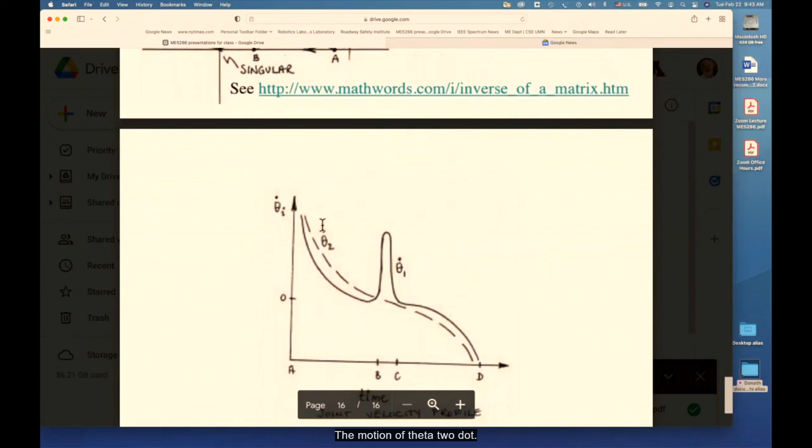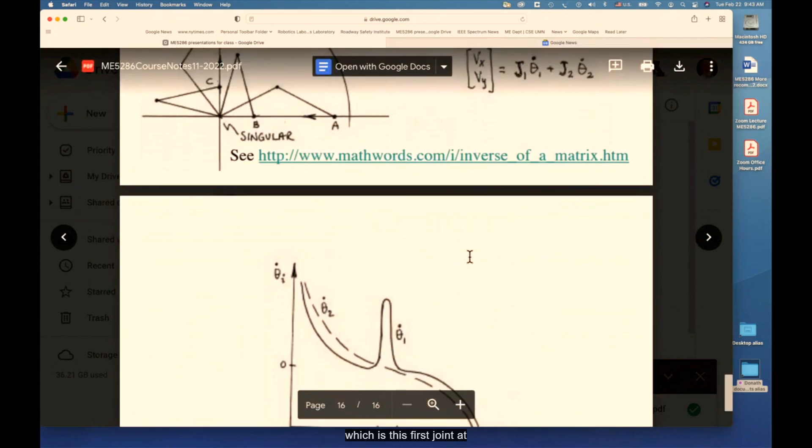So let's take a look at what that means if we were going to plot theta 1 dot and theta 2 dot as I move from A to B to C to D. What's going to happen, the motion of theta 2 dot is this motion over here. Not a big deal. But theta 1 dot, which is this first joint, at some location between B and C, it's going to go crazy.

Theta 1 dot is going to get very high the closer we get to the singularity. And in fact, I've drawn it as if it actually has a limit. I mean, in reality, it's always going to have a limit because the motor can't go that fast. It's just going to get stuck. But what does that mean in a practical sense?

Think about the power. Remember, at each joint, what is the power at that joint? What is the load at that joint? Power is torque times angular velocity. If my angular velocity gets to be very high, my power, my load, is going to get super high, and the motor is going to stall out. Stalling motors is not a good thing. Okay, you want to avoid that condition.

And typically before it stalls out, the bearings are going to go crazy, and you might damage your bearings. So again, stay away from singularities. This kind of just shows you this issue of velocity for theta 1 is just going to get extremely high. That means very high power load requirements. And so it's going to cause all sorts of issues.